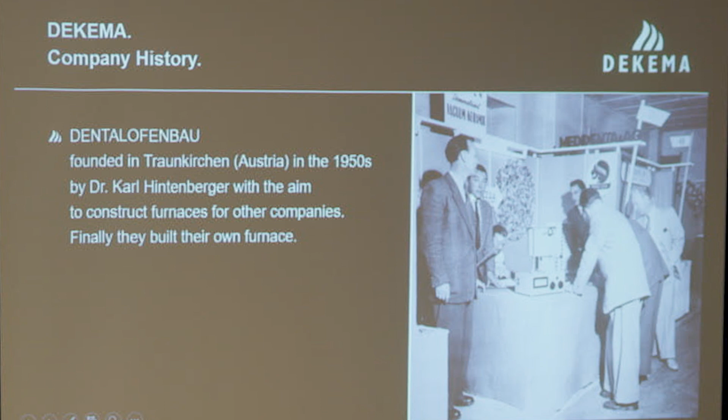DEKEMA itself is a company built up around 1973, but before that, this guy, Mr. Hintenberger, already invented the first vacuum furnaces. He was the one in the 40s who thought vacuum might be very good for ceramics. He was a dentist but went more and more into ceramic applications. He was even at the university in Chicago in the 30s. We've got a patent on that from 1936, which served us quite well regarding some competitors.

That's why we have a mechanical pressing system. Only we and one other company.

So he constructed furnaces more or less for everybody in the 50s. Then he wanted to even invent his own ceramic, and for the furnaces he created the company Dentalofenbau, which means nothing else than building dental furnaces, in the 50s.

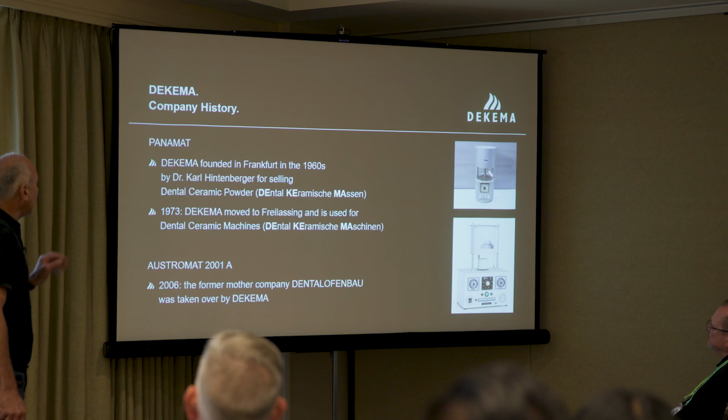We had the Panamat furnace first from Dr. Hintenberger, and with this he wanted to sell dental-keramische Massen, dental ceramic masses, and this is where the name comes from. That's why they're called DEKEMA.

This didn't work so well. This company, which was founded in Frankfurt, moved to Freilassing, just nearby Salzburg on the Austrian border, and he switched the name to Dental Ceramic Machines.

With this company, we built the Austromat 2001A. That's why it's called Austromat - because it was an Austrian, with an Austrian company, now building furnaces in Germany, who wanted to stay with the Austrian name, so he called it Austromat. Maybe you know about the Austromat 2001A.

This was a furnace sold in thousands by Vita. There was a strong cooperation between DEKEMA and Vita at that time. Dr. Rauter and Dr. Hintenberger understood each other quite well, and Vita was selling this furnace more or less worldwide, while from Austria these furnaces were sold only locally by DEKEMA. But we still use the same name, because through Vita, the Austrian mark name was spread worldwide.

Okay, so that's about the company. Basically, what's standing there is - I'm not a dentist, I'm not a dental technician, I'm a physicist.

I got introduced into DEKEMA already in the beginning of the 80s, with lots of information from my friend's father, who was Dr. Hintenberger, and I always liked this company. I saw that this is a niche where you can reach quite a lot, and where with all the knowledge you can approach ceramics and this technology quite well. So finally I started in 2003, which is now 21 years with DEKEMA as CEO.

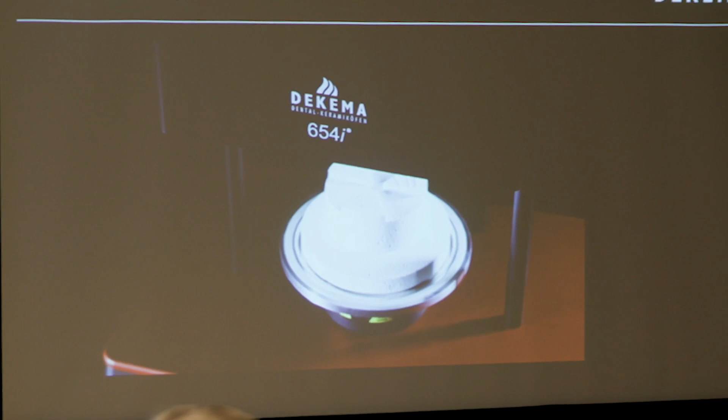Big within small, with passion and dedication to detail, and perfection and precision overall. At DEKEMA we have been developing and manufacturing furnaces for the dental industry for over 50 years, from our manufactory in Freilassing to the whole world. Our aim: to create a precise tool that will accompany dental technicians throughout their entire working lives.

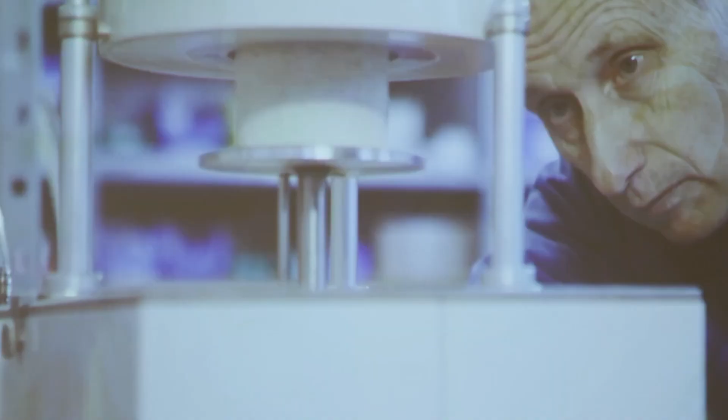Like many big things, everything began with just the first little step. It all started in 1973 with the Austromat 2001 - durable and highly precise, it revolutionized the dental market. A product 100% made in Germany, manufactured regionally right from the beginning. Always with a vision, we were the first company in the dental industry to rely on digital networking and brought the Internet of Things into the dental lab.

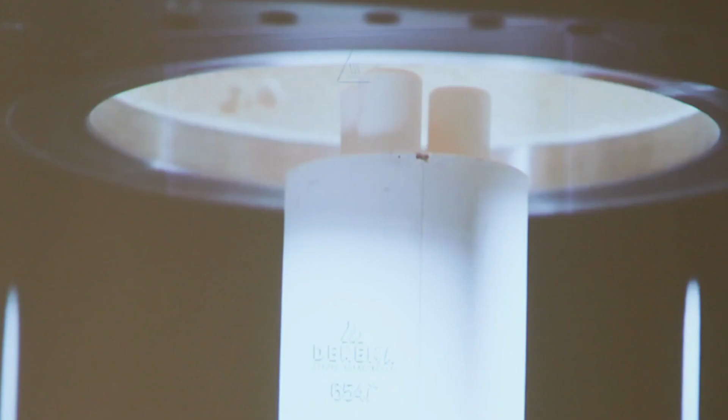Today, around 40 colleagues and perfectly trained teams provide global support at all times. In this process, we rely on our decades of experience. We have constantly expanded and further developed proven technology. Our DEKEMA firing chamber, designed decades ago, used for decades, refined over decades - this is how our products have always been creating the dental lab of tomorrow.

We take efficiency and precision to a new level. With our experience in the digitization of analog processes used worldwide, we create a unique workflow that brings the analog and digital worlds together in one 3D printing process, the TRIX process.

Our DEKEMA Circle Cloud functionality connects the work processes seamlessly.

Industries ask to use our tools. They are approaching us looking to participate in our precision, connectivity, and lead in technology. The development of new products and the continuous further development of our software is a matter of course for us.

Where the design of the perfect furnace was created by hand in the past, we today rely on fully digital processes. We simulate the visualization of individual components with augmented reality. This allows you to place your desired product virtually in your working space.

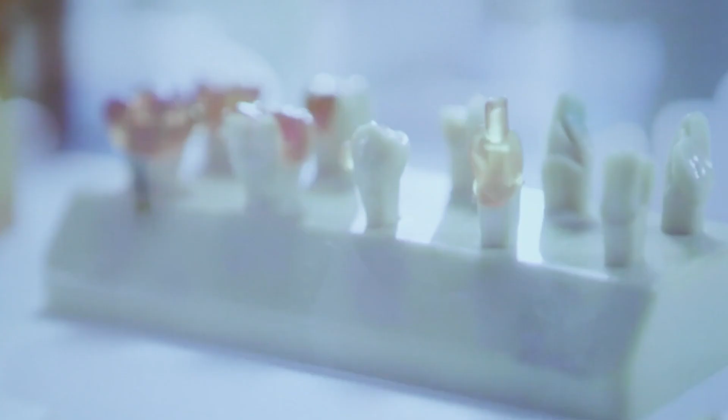Integrated into fully automated process chains, you produce high-end products with DEKEMA, for operations of any kind, from the small lab to the largest industry.

Big within small. That is fundamentally the standard of DEKEMA. The quality of a small series production, this flexibility and dynamism of a small manufactory, combined with the reliability and professionalism of a large company.

In small teams, we work all the closer together. My colleagues, my friends in this company are fantastic. Awesome. I am proud to be a part of this team.

Personal exchange, focused discussions, pros and cons, trial and error, all in the interest of the company. The product management, the administration, my colleagues in the other departments, research and development, production and manufacturing, sales and marketing, purchasing, service and IT. We all ride the same wave. Together, we're surfing confidently into the future.

Nice area. Yeah, we work where many other people want to make holidays. The southern part of Germany, that's really nice. Salzburg Festival, really nice. Okay, so now we are getting serious.

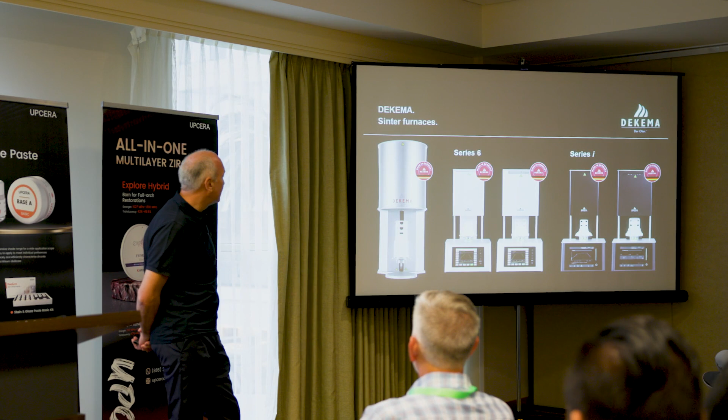With this furnace, we even started with memorizing data, so 100 cycles stored inside the furnace, having all information, all parameterization, just to know what's really going on. And the current series, which is Series 6, which we also have private labeled as an Upcera furnace. So the Series 6.4 with a small chamber and the large chamber of the 6.7 for 10 centimeter discs.

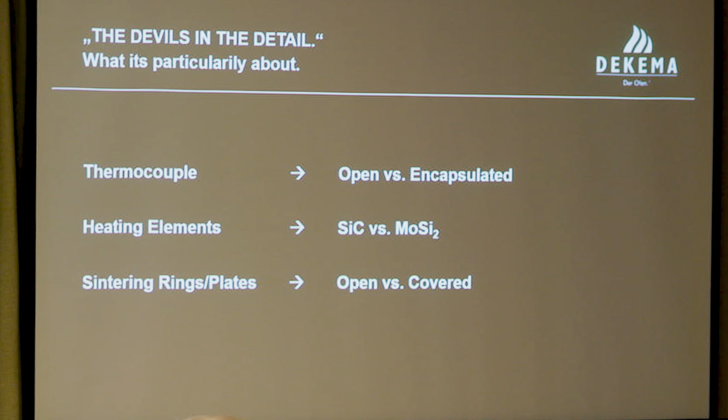Never forget, a device, a product can only be as good as the worst part inside. As soon as you try to reduce costs, as soon as you try to put something in which is not as accurate as the rest, you don't need the rest. So you have to be up to date, you have to have quality with every single part, whether it's insulation, thermocouples, heating, whatever it is. If you try to reduce these costs, you destroy the furnace and destroy the quality.

This is a catch-22, because surely we want to spread our furnaces, we want to make them more cost-effective, but we won't make them cheap. Because then, it's not a DEKEMA anymore.

Thermocouple - as I said before, what you see here is one of the data points, the information we get from every single cycle. With the Series 6 furnace, that's stored inside the furnace. With a backup, we get it into the database. With a Series I furnace, the furnace even sends us the data to have it already stored inside our database.

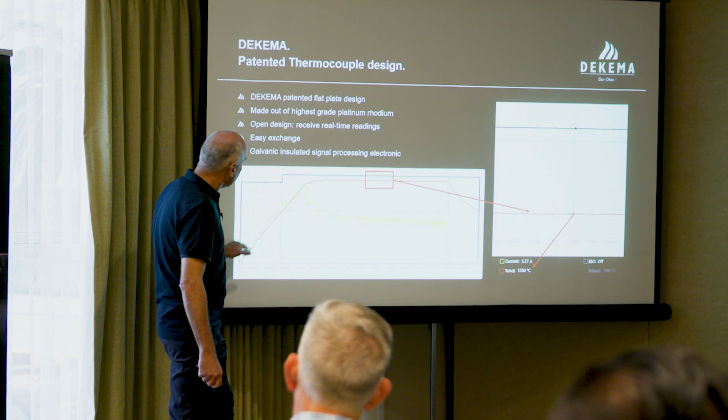In this case, let me check - you see the power consumption, you see the lift movement, you see the temperature as it is and as it should be, actual and destination temperatures. Now we move up with the temperature to somewhere around 1500 degrees, 1560 degrees in this case, and we open this, and you hardly see any deviation.

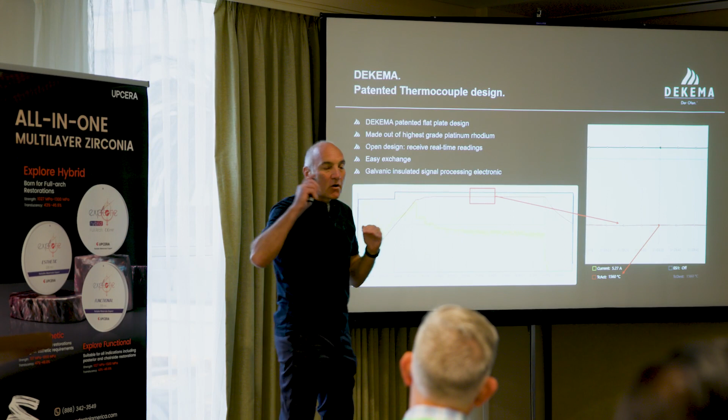That's controlled accuracy, and you can check this with every furnace. This is a data file which everybody can look into. That's open. This is not something - how do you say in English - data massage. This is real.

And how can you reach that? In the current stage, the final stage, we have a thermocouple - the temperature measurement with this pin here, which looks directly into the chamber. We don't want the thermocouple to have sunglasses for the radiation. In every other furnace, you have a so-called encapsulated thermocouple - a closed rod, and inside there's the thermocouple wire.

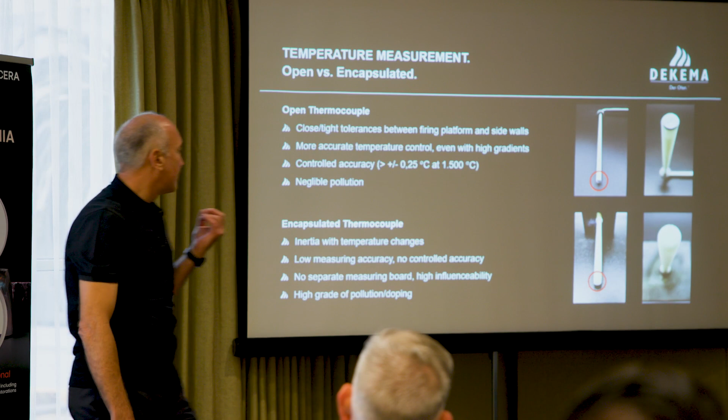What is happening in this case? In this case, as I said, it's like sunglasses. You are not looking directly into the temperature, into the radiation you want to see. The temperature always has to go through this alumina rod. And not only that - it's not only the temperature which is going through, it's even the pollution inside. You have lots of pollution - through the zirconia, through the coloration, through acids, not with us, but even through heating elements.

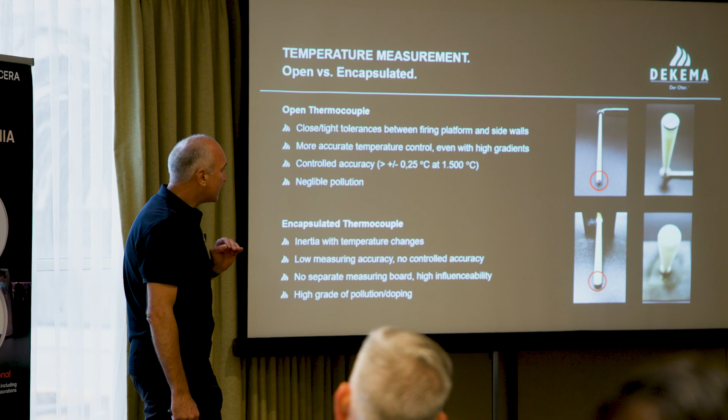And this is accumulating on this alumina part, leading to a permanent temperature change. This is what we want to diminish, what we want to hinder - negligible pollution. How do we do that? As I said, it's patented. First of all, like all DEKEMA furnaces, the thermocouple sees the real radiation.

Just imagine you have a fast sintering cycle. You want to sinter with some materials - you're going up, you have a 24-minute cycle with a DEKEMA furnace, rising temperature. You start at 1,000 degrees, you go up with about 100 degrees per minute, stay for 8 to 10 minutes, and then you cool down. With this temperature rise, you must not go over the peak. You have to have a real flat curve with the temperature. You don't want to stress the zirconia material, even more stress the zirconia which you already stressed through the short cycle.

With this technique, we have an absolutely instant redundance between the thermocouple and the controller. Here, the temperature outside and inside, maybe you have a 2 second delay. So how should you control that? How should you control that correctly? You can't.

But still, if you have an open thermocouple - and this was what we also learned with the first furnaces, with this old, huge ship - these thermocouples were eaten up by the pollution inside the furnace. Especially acids from the coloration liquids are a real issue for any furnace. In these cases, maybe after 200 cycles, the thermocouple was eaten up, it was completely etched.

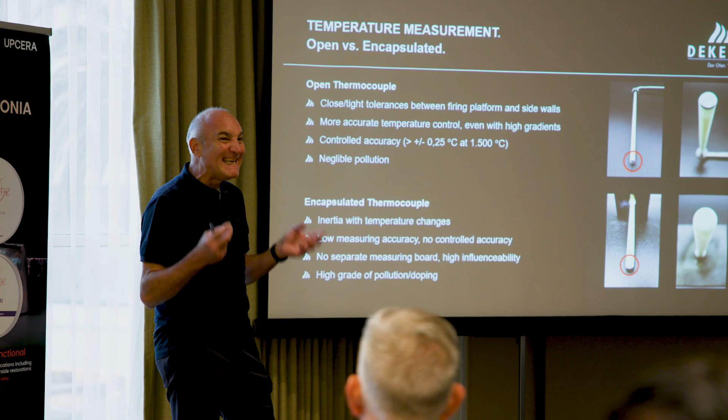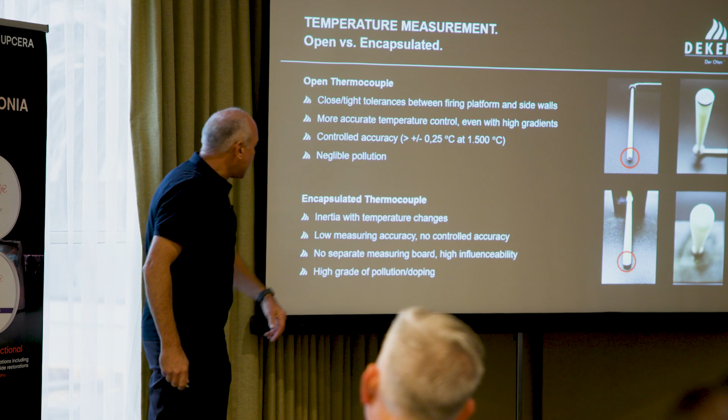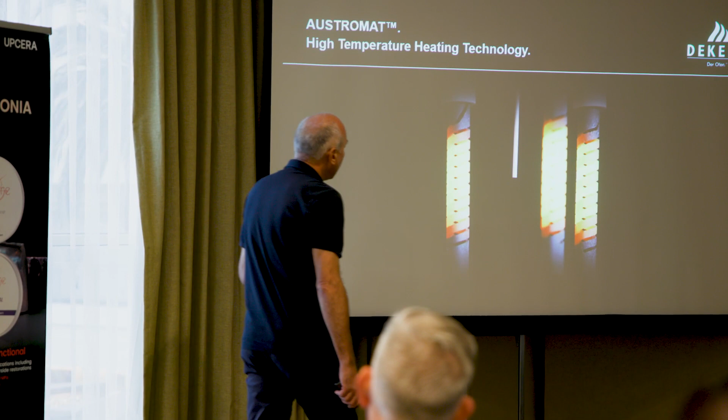So this is how we put it in. That's why we only have a limited height - normally it's a little higher, so we have a limited height for 2 to 3 stages, depending on the furnace. And here we measure the real temperature, the real radiation inside the furnace.

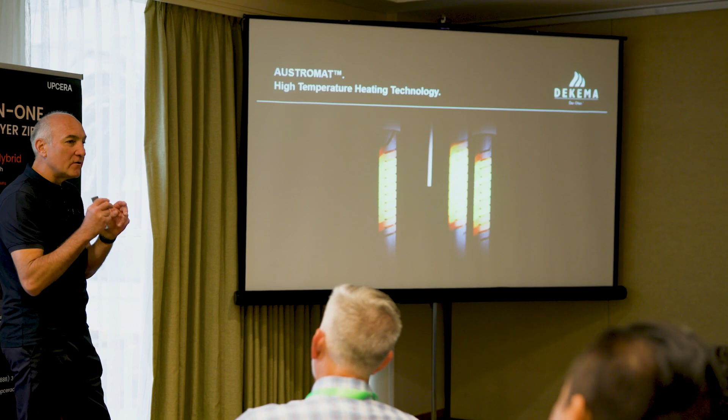Don't forget the picture with the other thermocouple - you have at least something like sunglasses, you never see the temperature, you never see the radiation which is really inside the furnace. By the way, you won't believe what's going on in the furnace at 1500 degrees. This is like heaven - everything is ionized. There's life inside.

Now we go to silicon carbide. Basically, there are two techniques. Some people talk about three, but the third technique is something like SiC technique. Induction furnaces do nothing else than a SiC heating element, using SiC or molybdenum disilicide.

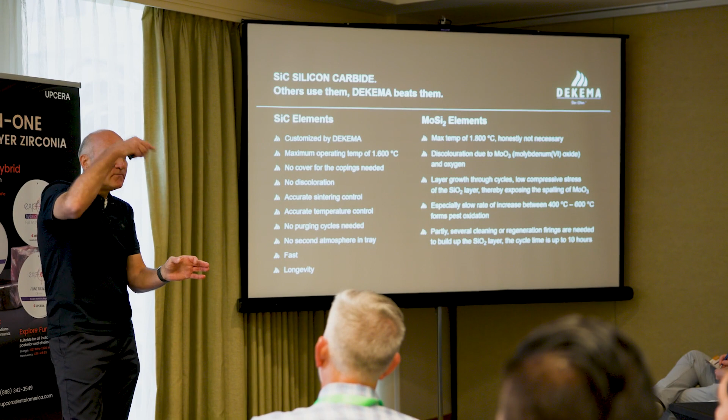Back in 1994, I made my diploma thesis in semiconductor physics, and I was working with a company called Wacker. Wacker produces silicon wafers. They have to anneal these wafers. As you know, wafers have to be absolutely clean, they must not be doped at all. How do they clean that? They take the silicon material and melt it in the crucible with silicon carbide heating elements around, because they don't pollute the silicon.

This was when I started with DEKEMA, and we said, what can we do? We should make pressing furnaces, not just firing furnaces, and sintering is also quite interesting - everything which needs accuracy in ceramic. Maybe we should look into SiC technology. But controlling this stuff is a completely different thing. So SiC is clean.

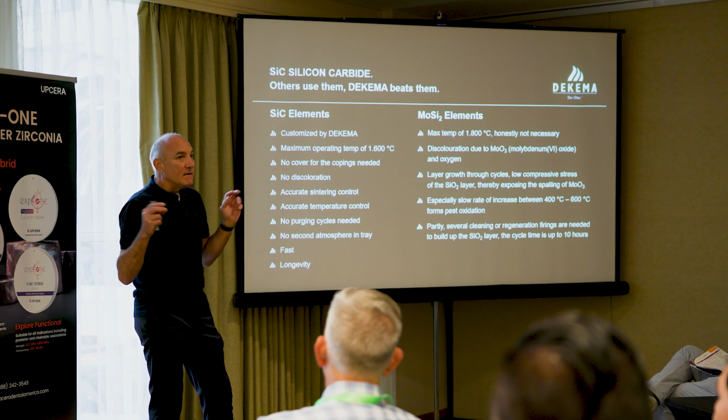MoSi is a pest, in my words. Why? SiC elements have an inert cleanness, and if you heat with SiC, the SiC element cannot accumulate pollution. MoSi is exactly the difference. With a MoSi element, you always have a glass layer around which saves you from pollution, because inside this MoSi element, you always have inert accumulation of different rare earths, of different polluting, greening, discoloring materials.

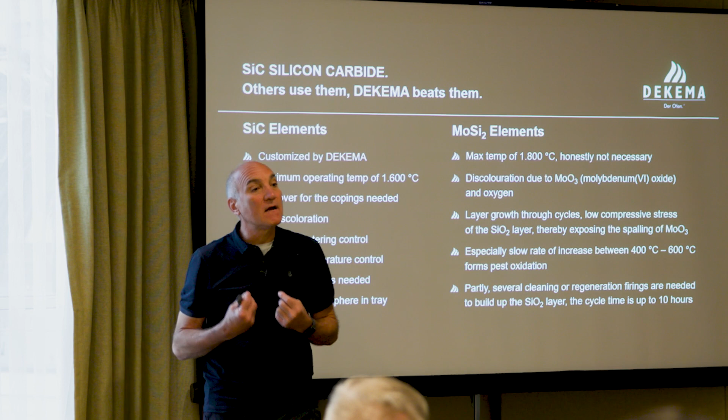And these glass layers reduce. There's even an area - this isn't my term, it's what they call pest oxidation - where it extremely accumulates all the pollution which is around, and then it spreads it again at high temperatures. As soon as the glass layer is gone, because it's reducing permanently, it's distributed into MoO3, molybdenum oxide, and into glass.

So it's a gas out. When this layer is gone, you have a lot of spread, and this is what you know from your zirconia. As soon as it gets yellow or green, this is not coming from the zirconia.

Maximum operation temperature, 1600 degrees. This is what many people talk about - yeah, silicon carbide is a nice material, but you cannot really heat that to high levels, and you're always squeezing out to the limits. That's why they are not so robust. No, it's different - you cannot compare this with MoSi.

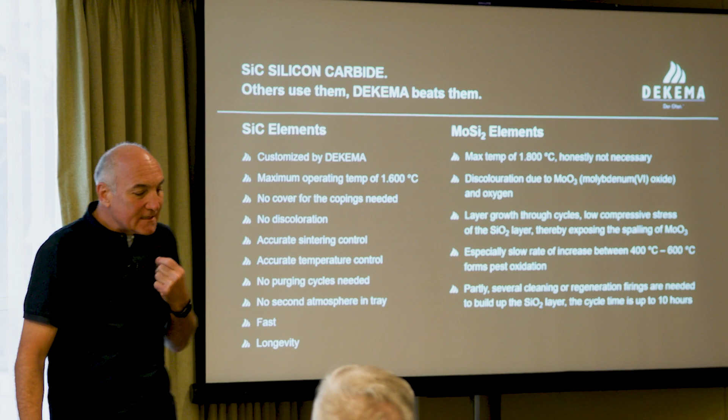The maximum temperature, which you're always told with a MoSi element, gives you the dissolving temperature of this element. It doesn't tell you which temperature you really heat it. It just gives you an idea of whether the longevity is longer till the glass layer is gone or not. So you cannot really compare the operating temperature of a SiC element, if you do it precisely and know what you do during control, with the max temperature of a MoSi element.

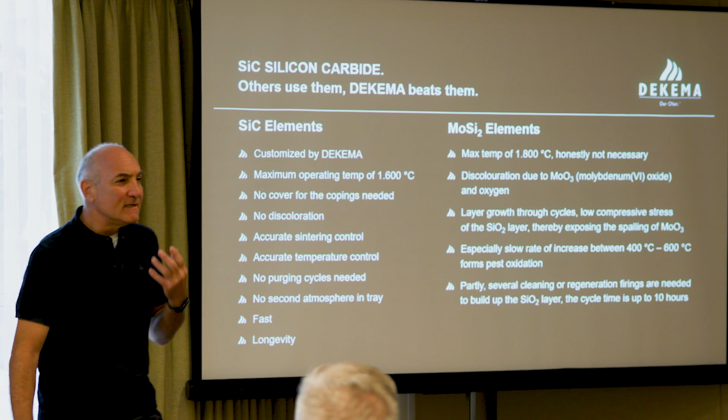For me, it's like talking about cars. It's like you have an electric car and somebody comes and tells you, but how many cylinders? None. Not a good car. That's a different parameter.

No cover for the copings needed. What do I mean? If you don't want to have green or yellow stages of zirconia inside the furnace, you have to put it in a crucible, because then all the pollution cannot approach your zirconia. We don't need to do this - we can directly work with the radiation which is approaching the material. So we have accurate sintering control, we have temperature control as we saw before, and we don't need purging.

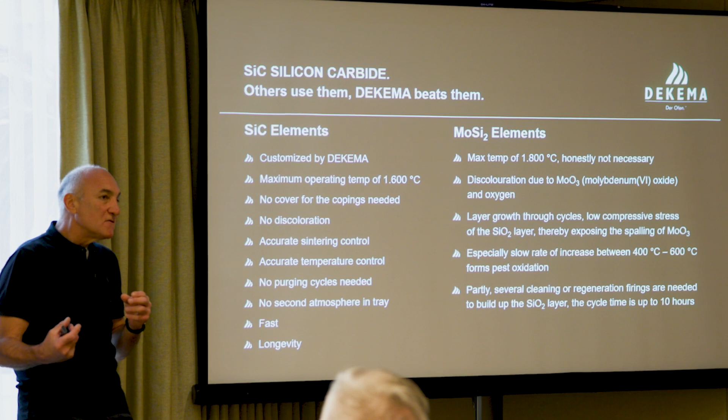Purging cycles with MoSi furnaces are nothing else than recreating a glass layer on the molybdenum disilicide, so you don't have any more greening effects. What you surely should do, maybe after two months and then weekly, is a 10-hour cycle, because the glass layer has to build up again slowly. How long does it last? Nobody knows - you know it when you have the next green zirconia.

Just let technicians get used to it - oh, it's not the right color, I put whatever color on it. But this is not good, it's not real. So no purging cycles needed.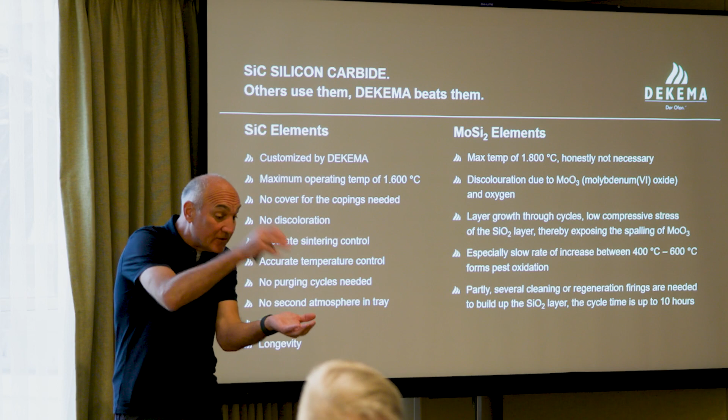No second atmosphere needed, because if you have a crucible and you close it, it's like with a thermocouple - you're in a house, do we have the same temperature outside when the sun is shining or not? No, not at all, because you have a completely different regime inside. You never know which temperature you have inside, you only know the temperature of the thermocouple. But if the temperature of the thermocouple is exactly the same as your zirconia, you know that's the right temperature.

That's why we work in an open regime. We want to know which temperature we have on the zirconia, not inside some crucible.

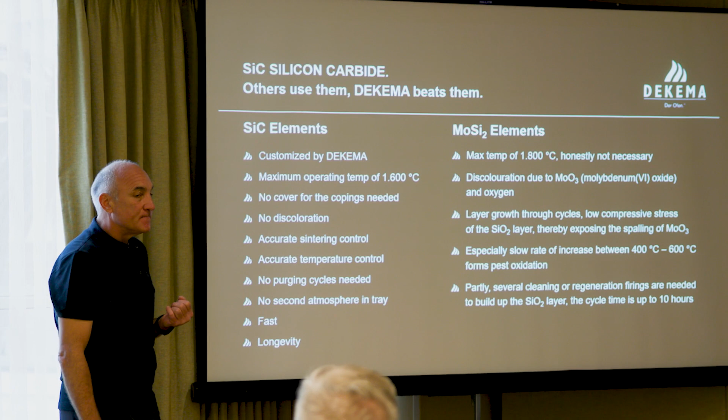Then the robustness. This was 2008, so we started with 3M and the first furnaces in the US. I wanted to convince them that they should use fast cycles, and we had the Doceram materials at that time. Doceram, I can talk about this because the company doesn't exist anymore, not because of the zirconia, they were bought by Dental Direct. We had a 90-minute sintering cycle with the zirconia from Doceram in 2009. What we were told by Wieland, by 3M, was nobody needs it. They all sinter overnight, no need. So small DEKEMA couldn't convince anybody that a fast cycle would be necessary. Now everybody talks about zirconia in less than 1 hour or even less than half an hour.

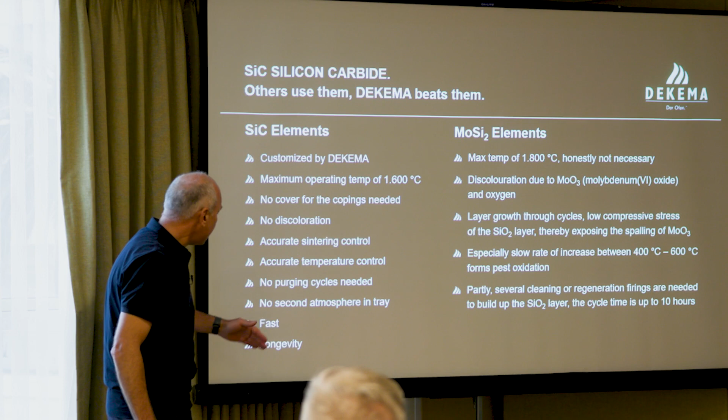So fast. This material can be stressed. We don't talk about lifetime, we talk about cycles. And this is what you even should do with these.

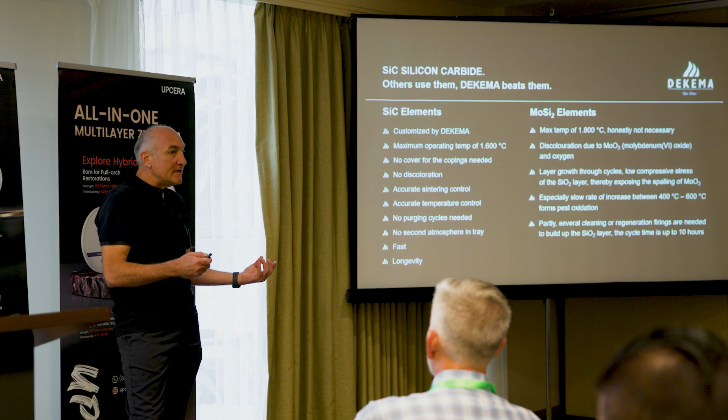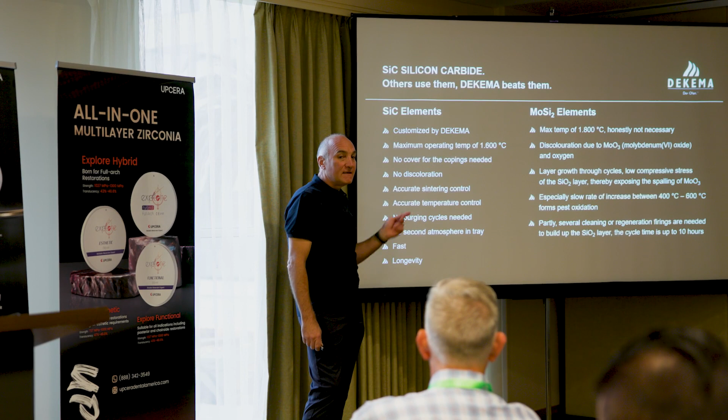But it's not about this, it's about this number of cycles which we drive. So please remember, it's about the number of cycles you're running, how often do you heat up the heating element and cool it down, not about how long you heat it. There's a small difference, and you can imagine from my explanation before that these heating elements build up these glass layers. So surely the longer you reduce it, the less good a result you have, because there's no glass layer anymore. But still, we should talk about cycles, and then you will see that we talk about completely different longevity with a SiC element and with a MoSi2.

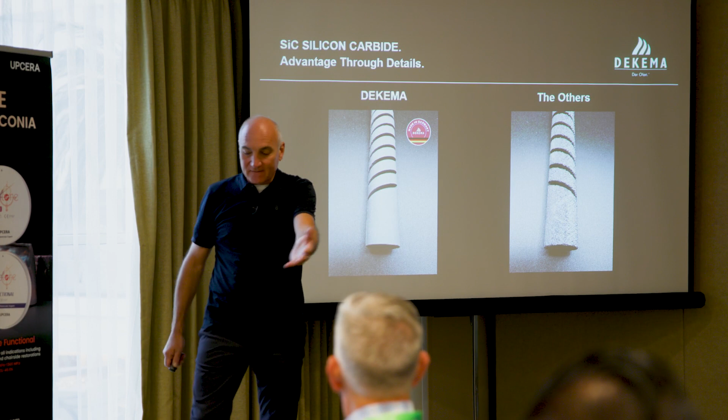This is because we need this kind of special recrystallized silicon carbide, which I think nobody else can get. So surely go to Alibaba and you find DEKEMA heating elements for 80 euros. We know what you take, what you put into the furnace. We know how much electricity consumption you have with the furnace. We tell you immediately what you put in. So don't blame us if they are not safe.

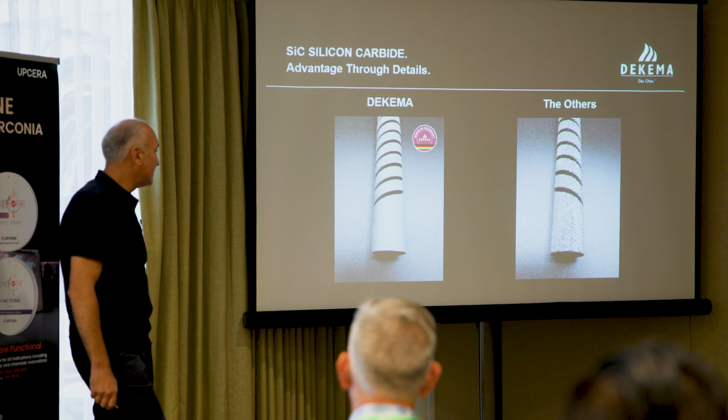So really, summarizing with the SiC material, if you know what you do, how to control it, and you have the right material, it's a no-brainer.

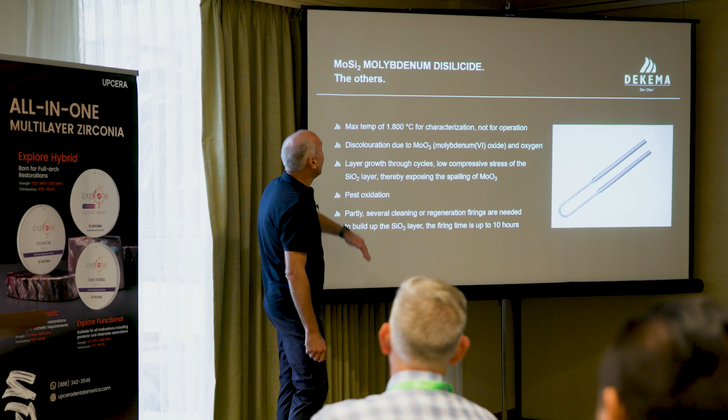Okay, so summarizing up again. As I told you, I didn't know the slides before, but now it's a summary. Now we can summarize it. It's a characterization temperature, not an operation temperature, what they talk about when they talk about 1800 degrees. And what do you need an 1800 degree heating element for? Zirconia.

Discoloration because of rare earth, molybdenum trioxide, and so on. Layer growth, meaning you need glass. Pest oxidation of these layers, which lead to a pollution of your zirconia. And cleaning and regeneration cycles, purging cycles, which you need every 1 or 2 weeks. If you don't do it, okay, you have green zirconia. If you want green zirconia, don't buy a DEKEMA.

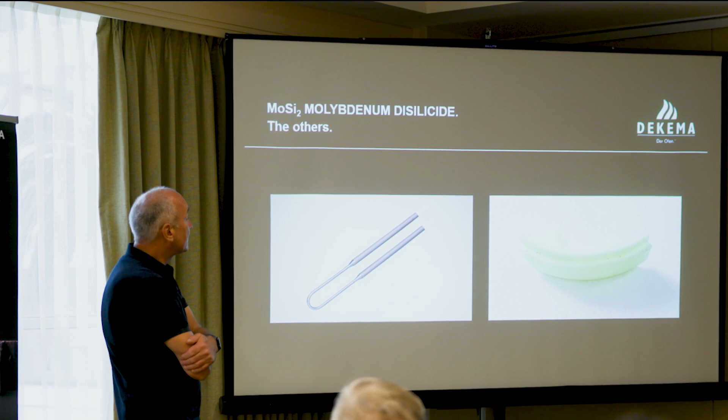And this is a typical result we got from a customer, not from us. Typical result, not colored, white zirconia out of a MOSI furnace. And I think everybody who has a MOSI furnace saw something like that, whether he knew that it's originated by the heating elements.

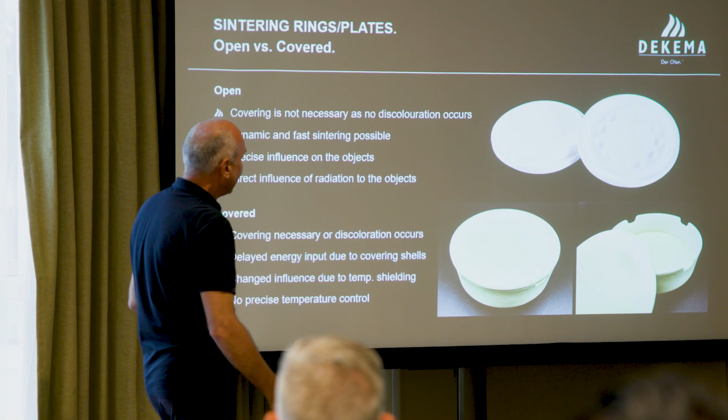Crucibles. You see the color of these crucibles. You see the color of these pots. And again, you need a crucible, you close it, you cannot sinter fast. As soon as you work like this and you have high heating rates, this will all explode, because these parts cannot withstand the high temperature changes, the high temperature.

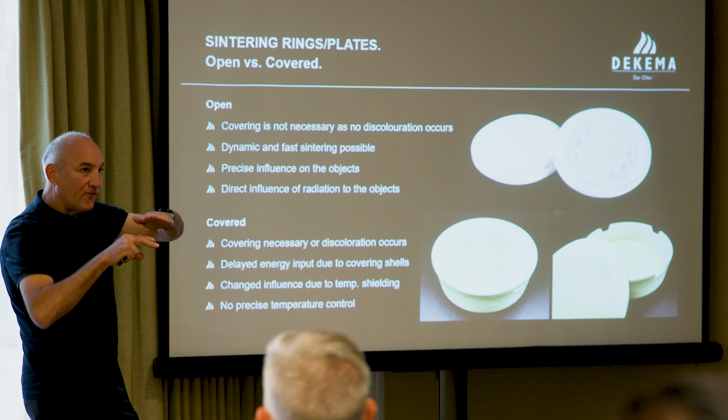That's why we have a patent on rings and plates, as we call them. So we have a horizontal and a vertical part. The ring is a vertical part, and the temperature expansion and shrinkage is fully independent. That's why we heat up so quickly with the right material. This is not alumina. No covering necessary, first of all, so even the rings have huge openings to get the radiation in.

And the plates with numbers on one side, so you can put single units inside, with a flat part for, you will see later, micropearls on the other side. And even if you want to work, I don't know why, with a very thick bed of pearls, you can put them in here and put your zirconia.

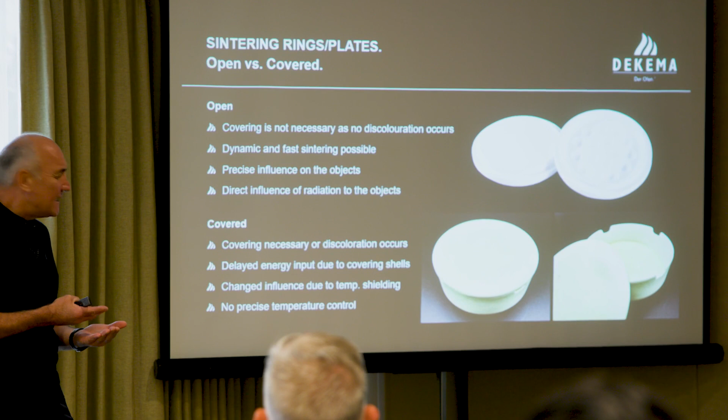But why are you working with a thick layer of pearls? To stabilize the zirconia. It's not really stabilizing, it's even worse. Now, where is it? Here it is. Because with a thick layer of micropearls, if you put it in and they shrink the zirconia, you easily get destabilization in between or even in these.

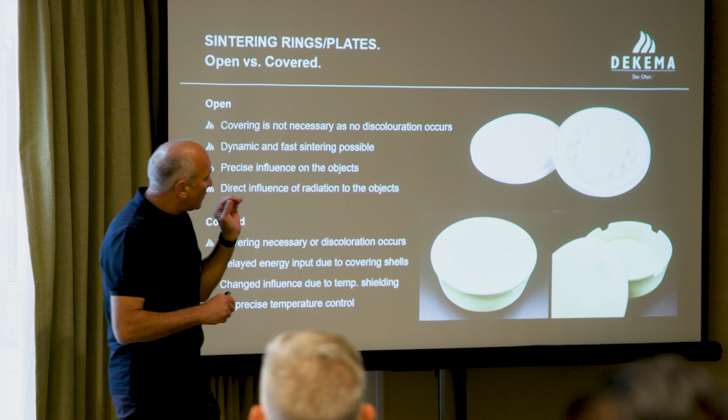What we suggest is using so-called micropearls. We have pearls with a very small diameter, around 0.5 millimeter, and we only put one microlayer on this plate, and then the parts on top, because this is friction-free movement for the zirconia. You have the perfect radiation input. The part can move friction-free on this one layer of micropearls, and it's finished. I don't even mind whether you put your large spans like this or like this.

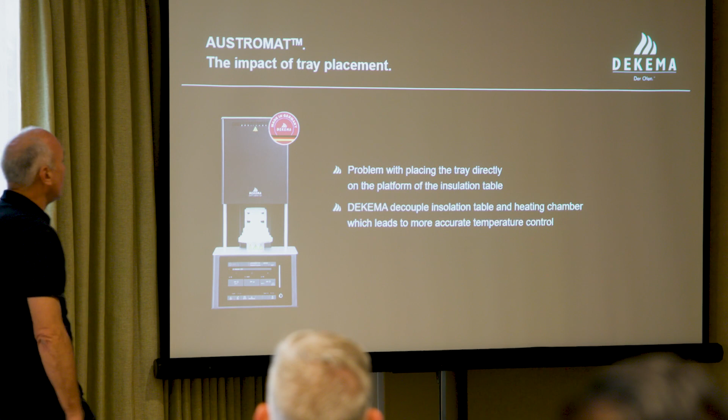Insulation. Impact of tray placement. When I come to customers and I realize that they put the first layer of zirconia on the insulation, I see that they don't know what they do. We try the best insulation for the zirconia to get the best energy input you can have. And they put the zirconia on the ground. Why do you do that?

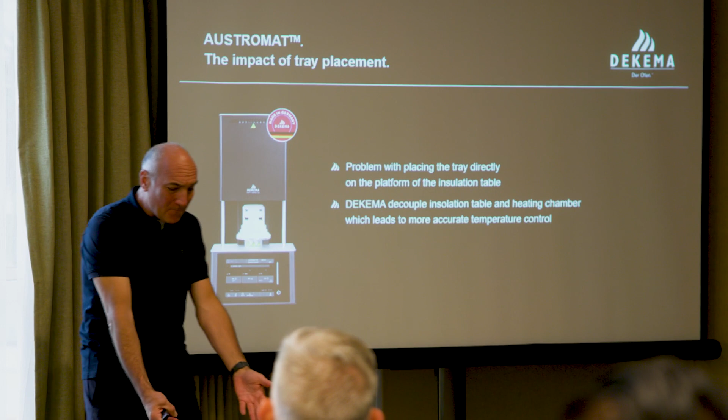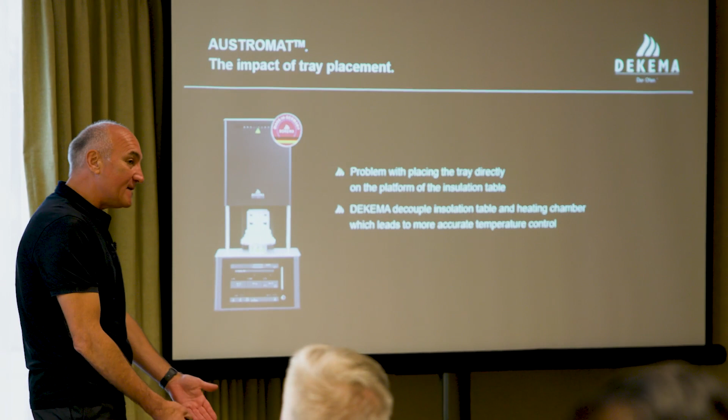If you have a marble floor in a room and you're going with your bare feet, it's cold. What do you do? You use a carpet. You insulate because that's too cold. Or even shoes, you wear shoes, that's even better. Or you use wood because wood is insulating. So it's even nicer to go on a wood floor than on a marble floor with bare feet. So you have a completely different view.

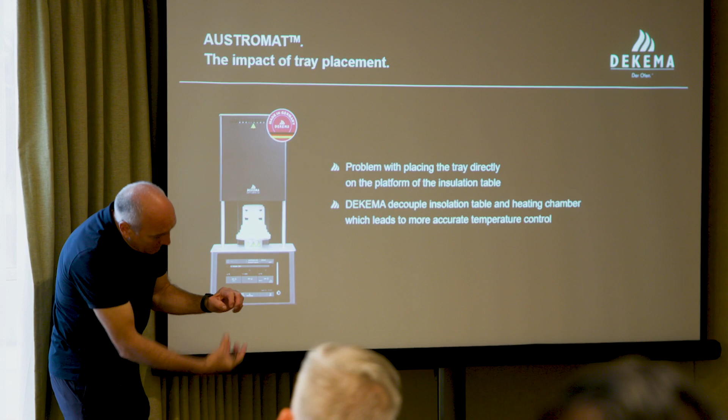It's that you don't want to get all the heat into the insulation. You want it insulated from the ground. And when I hear from somebody having his PTC ring say the furnace is 20 degrees too low, I know: you put it on the insulation, not on the plate, on the insulated plate. Because this insulation will squeeze out all the heat of the zirconia, and the zirconia won't see the real temperature. That's why we created the first ring as an insulation to the ground with the first plate, and then you put the zirconia on the first plate. And don't use the ring upside down.

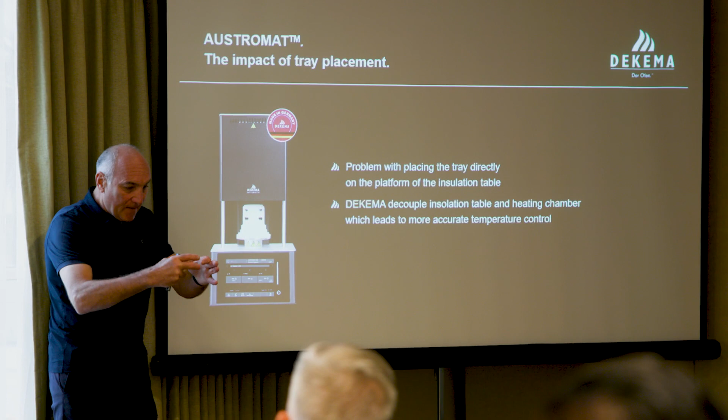Why should you use a ring upside down? This is a patented table. On this table, this is a multiple compound table with alumina rods, which are not going to the ground, because they also have to be insulated. And this ring itself is again insulated from the insulation here, from the table. So even if this wearing part is wearing, it doesn't matter, because the ring is not held by the insulation, it's held by the rods.

Nevertheless, with other furnaces, you never remove these parts. Why do you remove the ring from a DEKEMA furnace? Because you don't use the right handling tool. Why do you complain about rings and plates which are breaking? Because you don't use the right handling tools.

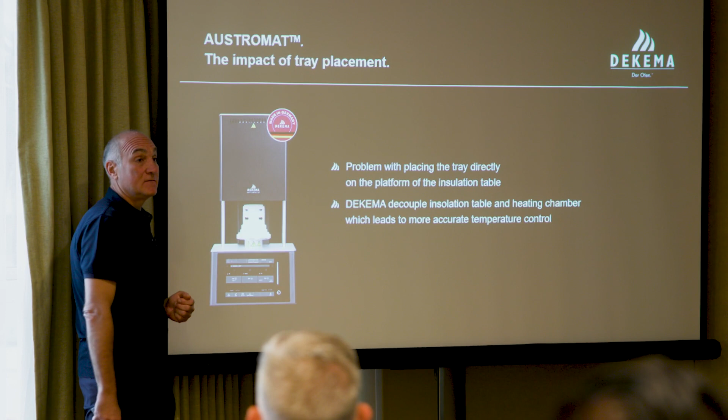Come to that later. So, as I told you before, this is how we would like to work: only one layer of micropearls and the material on top.

Okay, let's come to this first. And then I talked about the right tools. If you have the right tools, you don't remove these rings. But most people don't bother. You have a metal plate. You use our plate with the zirconia on top. It's hot. You remove it and put it on a metal plate.

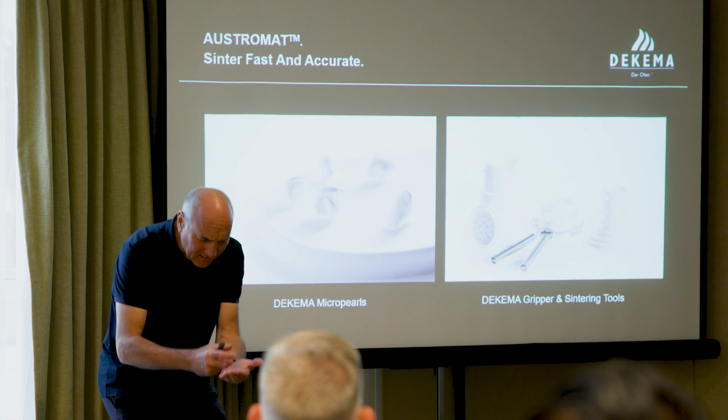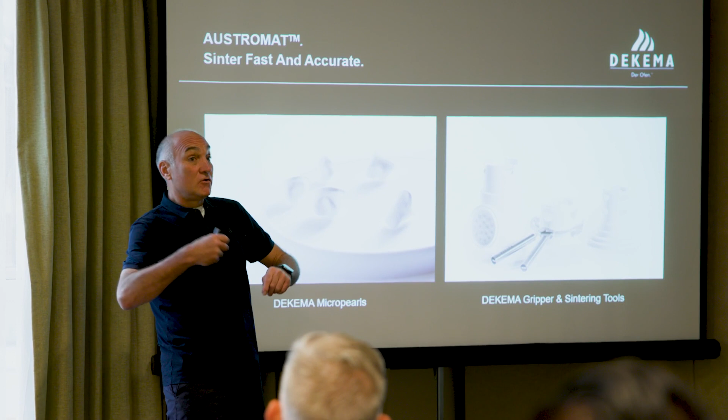It's thermal shock for everything. And what you then produce is micro cracks inside the plate, which you don't realize at that moment, which you realize in the next part, one of the subsequent sintering cycles. So you think this plate was breaking during sintering, but basically it was already breaking when you put in the thermal shock. So never put a plate, also with other furnaces, never put it on a metal grill.

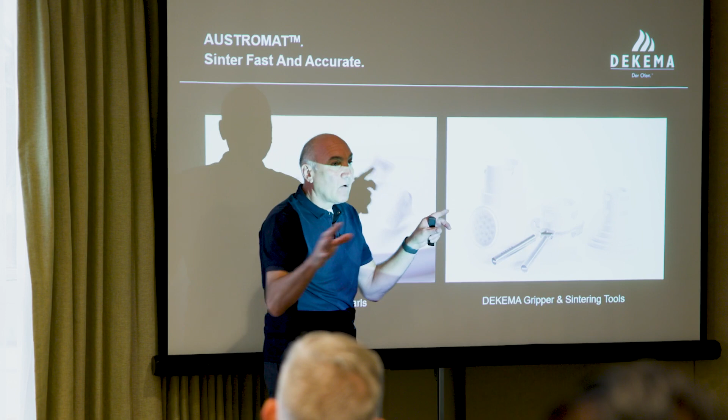What we created is a special sinter plate, which is a special insulation stone and one ring. So you use the gripper, and with the gripper you put the plate on this ring, and all these components don't see any temperature shocks. So the rings more or less last forever. So that's all a handling question.

Basically, I talk a lot about these things, but that's what I'm for. You don't have to know this. You should just know: please use sinter plates in the gripper and don't remove it with your hands. This will make your life much easier, your costs much easier, our revenue less because you don't buy some plates.

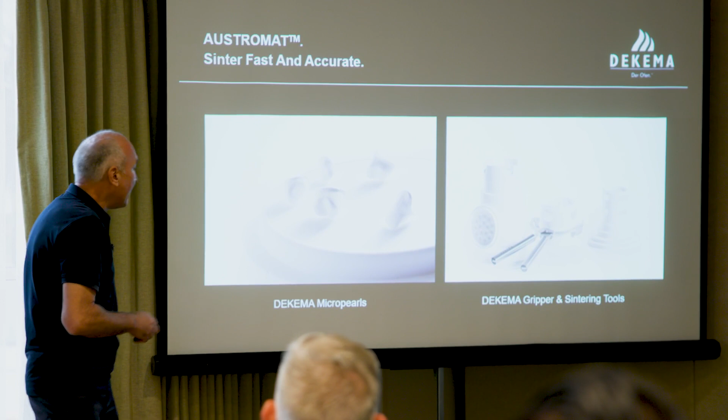But not so many complaints, and this is also good. Okay, let's go back—here we were, let's go back here.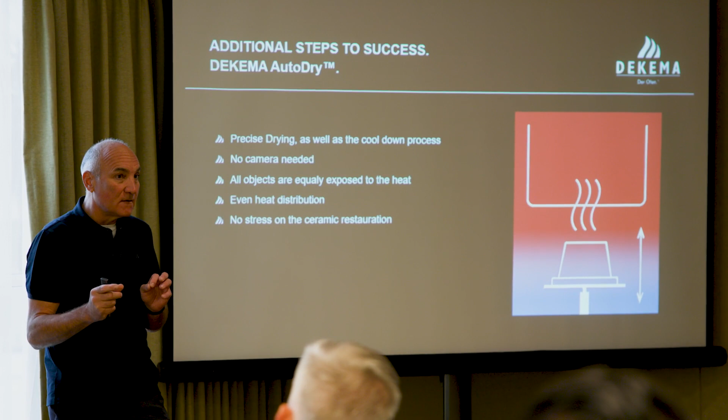What we did at that time: we wanted to have the furnace already preheated for ceramic furnaces, and use the heat of the chamber for drying ceramics, typically at 160 degrees. You can adjust it, but typically you work with 160 degrees. During the heating up of the chamber, we move the lift so that you really have 160 degrees radiation on this table, giving a homogeneous radiation to dry your material. You can then right away close the lift and start your furnace.

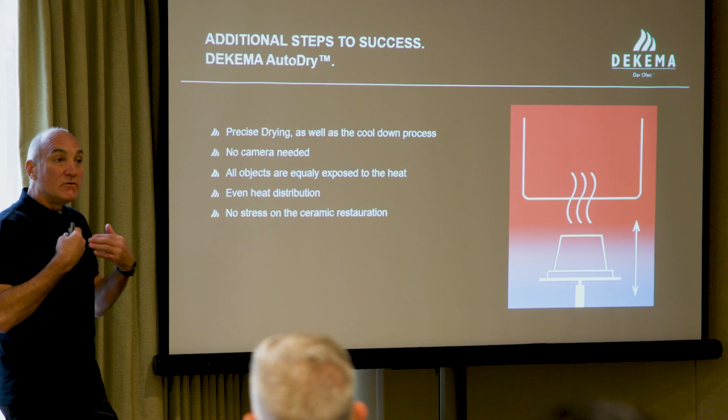This has been expanded to the complete temperature range, even for sintering. So what we now include in all these furnaces is the possibility to work with the residual radiation of the chamber. You don't know, but these furnaces open already at 1,000 degrees. You can open a DEKEMA sintering furnace at 1,000 degrees—nothing should happen. You can close it at 1,000 degrees, open it, and use this residual energy of the hot chamber for subsequent cycles.

Coming back to MOSI—MOSI is brittle. With a MOSI furnace, even if it's fast, you have to wait and cool down below 200 degrees before you start the next subsequent cycle. So a fast furnace can be quite slow if you have to wait till it's down to 200 degrees.

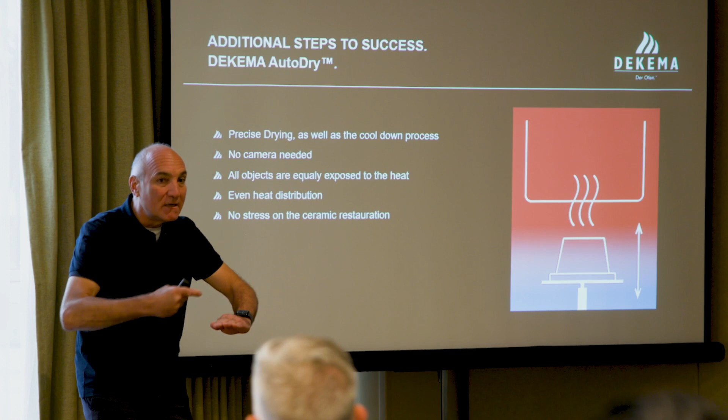With a DEKEMA furnace, if it's still 600 or 800 degrees, we don't mind. If you want to start a subsequent cycle, the cycle tells you to start at room temperature and go up to 700 degrees at 60 centigrades per minute. We will move the lift so that the zirconia sees 60 degrees per minute by moving the lift. So we still have a hot chamber—we move the lift so that you have your first rising temperature steps, and you can directly proceed.

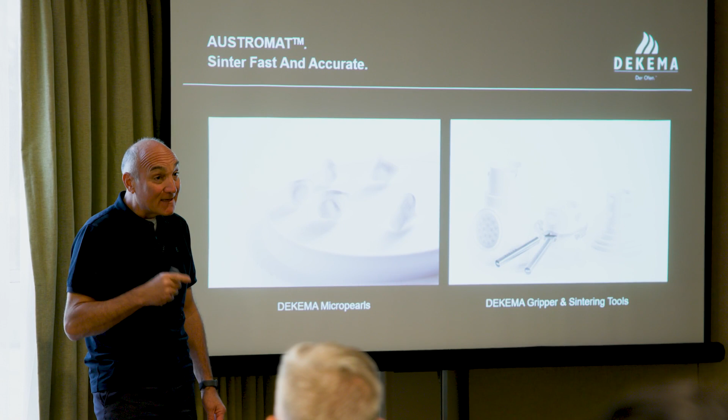So when I talk about a half hour cycle, I mean a subsequent half hour cycle which you can run 48 times per day. When I talk about 700 cycles for a heating element, this means 2 weeks for a heating element—but not because the heating element is so bad, it's because it's 700 cycles.

So this is what you can do with such a furnace. You won't be able to do this with a MOSI. With the right tools, even these elements, even these parts, will survive.

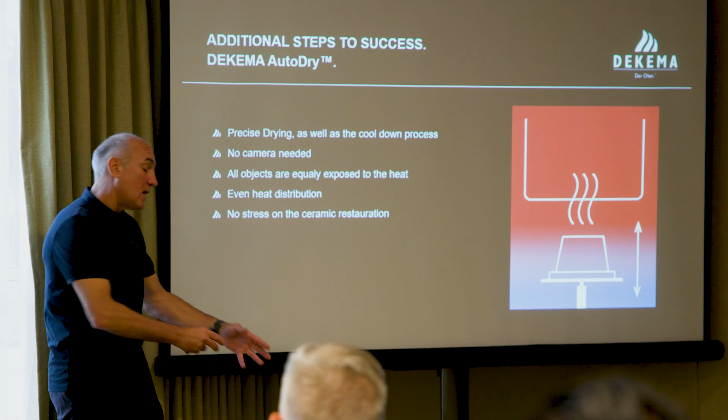So, equally exposed to heat, at any temperature up to 1,000 degrees, in any furnace, whether it's a firing furnace or a sintering furnace, besides our small 220. So the 220 doesn't work with this feature—all the other furnaces have it.

We don't need a camera. I don't know why you'd need a camera—it's a matrix, it's a lot of data, a lot of experience, a lot of information inside the furnace. I don't like cameras which get dulled after only 20 cycles; you have to remove it, clean it, or switch it off, whatever.

All objects are equally exposed to air and to the heat, because the heat comes from the top—even heat distribution and no stress for this ceramic restoration.

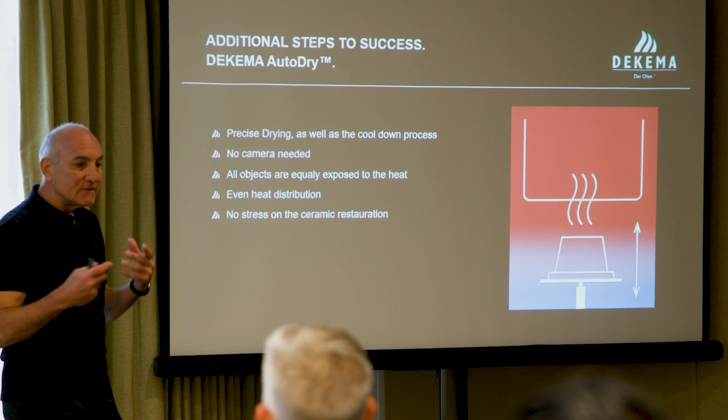So just remember, AutoDry comes from drying ceramics, but is basically able to reproduce any heating or cooling gradient on your zirconia. So when you want to cool down at 200 centigrades per minute, and you're below 1,000 degrees, the chamber opens so that the zirconia sees 200 centigrades.

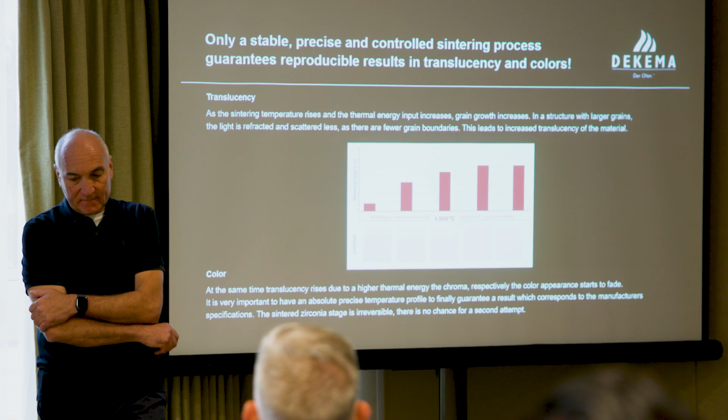Okay. Now, we didn't talk about why do we need such a precise furnace—these stupid over-engineering Germans, a sintering furnace with 0.25 degrees.

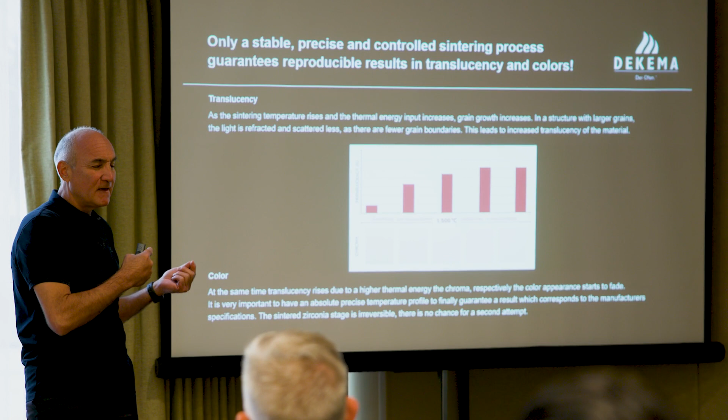A sintering furnace where we even just created a calibration tool which helps this furnace be really calibrated. What do I mean by that? Calibration—in case you calibrate other furnaces, you'll realize the manuals tell you if your PTC ring shows a deviation of more than 10 degrees, you should recalibrate it. If I talk of calibration of more than 10 degrees, you would never have to calibrate a DEKEMA furnace until the thermocouple is broken.

But through ISO, and customers who want to calibrate typically once a year, we need an easy tool, not too expensive. With the MOSI furnace, we had calibration with an external thermocouple costing $2,500, because you needed a special insulation table, special evaluation electronics, and so on—this is what was sold more or less with every 3M service engineer. Good for us, but not for the customers, because they couldn't calibrate themselves. So now we found a solution for how to calibrate DEKEMA furnaces with PTC rings the right way.

What do we do now? You get a caliper from DEKEMA. If you use a caliper, you don't have to calibrate at all, because a caliper will give you 10 different values from 10 different dental technicians. That's absolutely inaccurate. You get a micro gauge from DEKEMA, you have a PTC ring, you need to know the right batch number, you need to know where to place it. What do you do? You take the ring, put it into the furnace, use the calibration cycle—you must not use any other cycle, nobody knows that. If you use anything other than one hour, you have a deviation on the ring, because the ring sees less or more temperature.

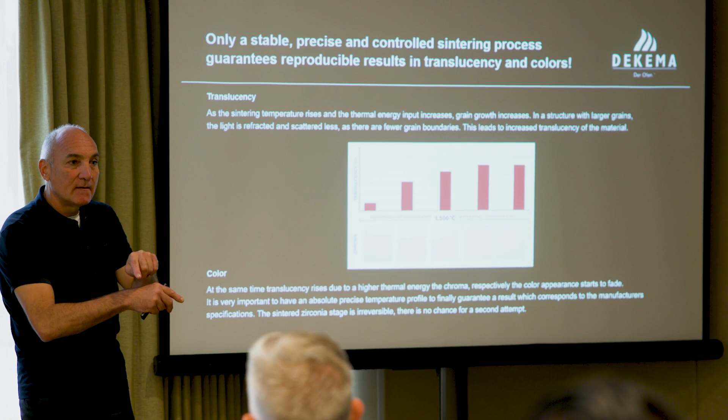So if you put a PTC ring into your standard zirconia cycle, which has a 2 hour sintering time, it will give you at least 10 degrees too high a temperature, because the ring shrank during the second hour. Nobody knows that. Use the calibration cycle already in the furnace. You go to the DEKEMA online platform, give the serial number of the furnace, the batch number of the ring, the diameter of the ring, and you get your CCF. You get the parameters for how to change it inside the furnace, and this data is automatically stored in the furnace's history. You can always look at it, use it for quality management. That's all included with DEKEMA Online as soon as you buy a DEKEMA furnace. You need to see the rings the right way.

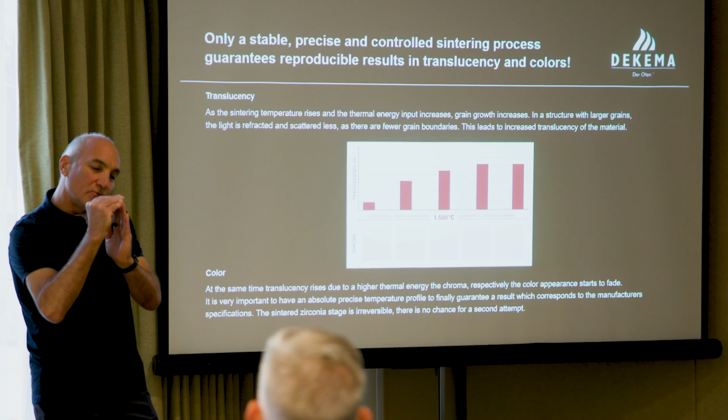So back to zirconia, especially colored, multi-layer zirconia. The problem is you always have a trade-off between translucency and color. There's a right temperature edge you want to reach to have the right translucency and the right color. If you go higher, you more or less burn the colors—you get less coloration, maybe better translucency. Because translucency, by the way, does nothing else than destroy the grid of the zirconia.

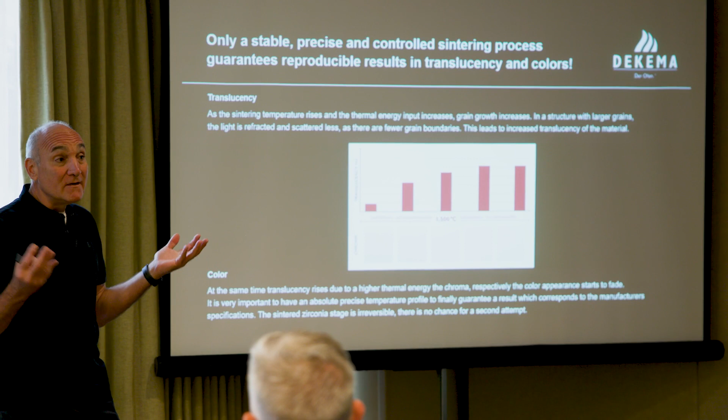First generation zirconia was heated up to 1600 degrees to achieve best translucency. This was done because people wanted to destroy the zirconia structure to get better translucency. So it's an amorphous material with different grids inside, different expansion factors—it's a mess for the zirconia, but better translucency. Then they put the color in with the last generation zirconia, so now they realized the highest temperature is not the best. It's always the temperature where you get the best translucency and the best color, and this has to be found. In any case, this is not more than 1560 degrees; for most materials it's somewhere around 1450 to 1530.

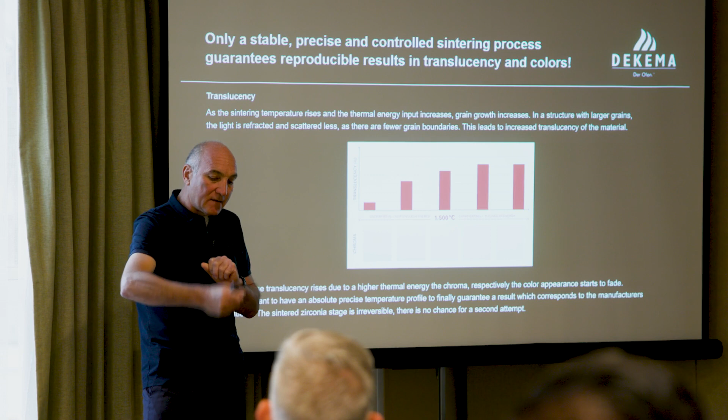So having the right chroma and the right translucency gives you a very small temperature range where the furnace really needs to work precisely. This has to be precise and reproducible, like with a ceramic furnace. This can only be done if you have the right tools, the right parts, the right materials, and the right service in the back through DEKEMA.

Okay, so far? Questions? No more questions? He got off easy. Yeah, it's always—I didn't know when it would come, but it's more or less always the same.

I'll ask one question: how does the oven compensate for mass? We don't have to compensate for mass. Why? What do I mean—when we have power, the furnace has automatic power consumption from silicon carbide, which is absolutely necessary. In my eyes, other furnaces may not do it because we have patents on it, but it's absolutely necessary to have the right balance between power consumption, power, and radiation.

So when you have more material inside the furnace, the heating element needs more power to heat up, but the control will always limit it to the maximum—how should I say—to the limitation of all values you may use. So you will never overstress the furnace, the material, the sintering means, or whatever.